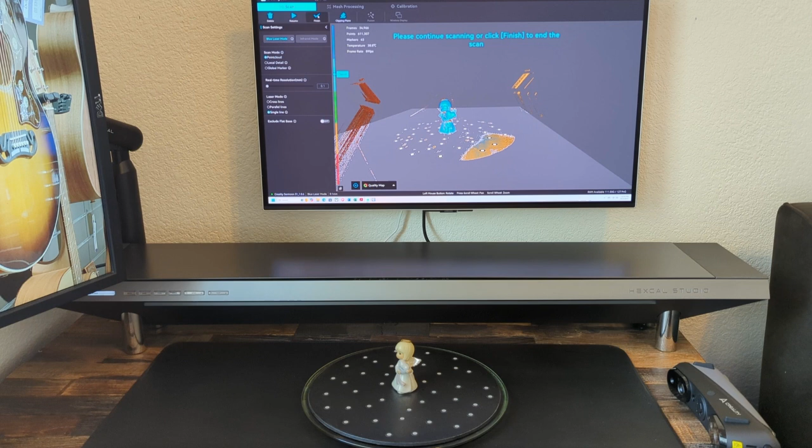Here I clicked on Finish to complete this particular scan.

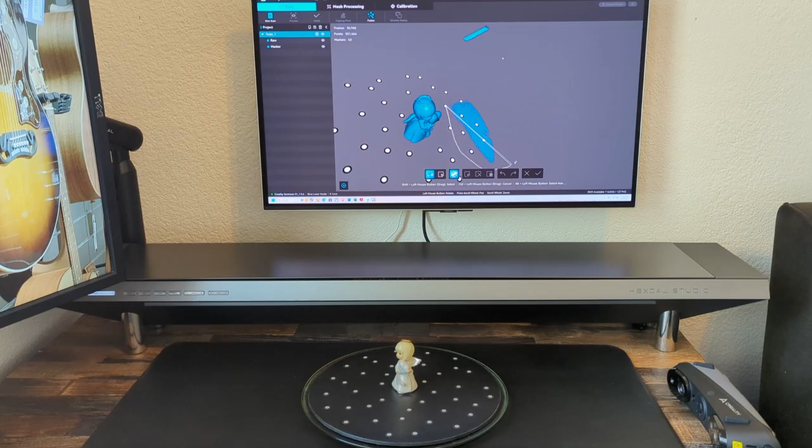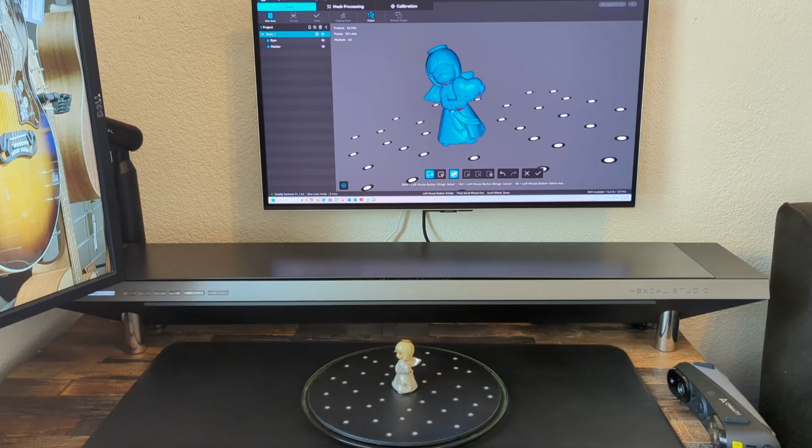You can also edit out any extraneous scanned information by selecting the Shift button and using the left mouse to circle around noise. It highlights it in red, and then you can click the Delete button. When you're fairly satisfied, you click the checkmark button to save the edits.

That's what I did right there. Now I've chosen to fuse the model. When fusing, I decided to use the standard instead of fast setting, and I used a resolution of 0.1 millimeters, 50% noise removal, and chose to remove the markers.

Here the model, or the scan, is being fused, and it takes some time. I left the speed here at real time so that you can see how long it takes to fuse a scan. You can choose to fuse after each scan, or you can wait and do several scans and then fuse them all at once through batch fusion.

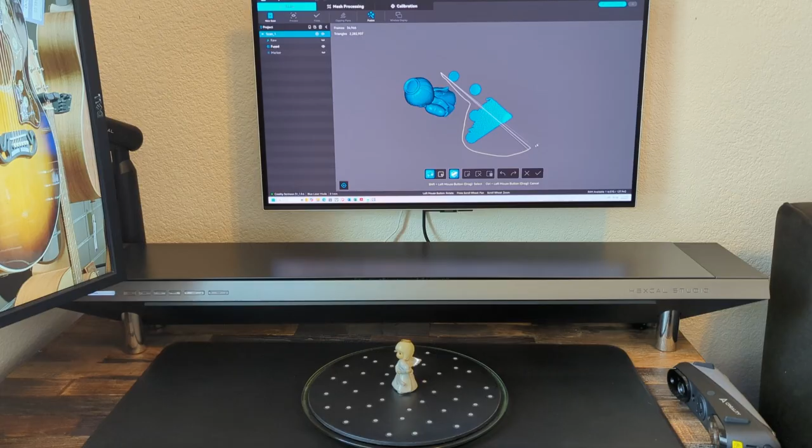Now that the fusion is done, you can choose to edit some of the extraneous noise. I'm using a lasso tool, using the shift key and the left mouse button to circle around the noise that I want to remove. I delete it, and check around the scan to see if there's any more that I want to choose to delete.

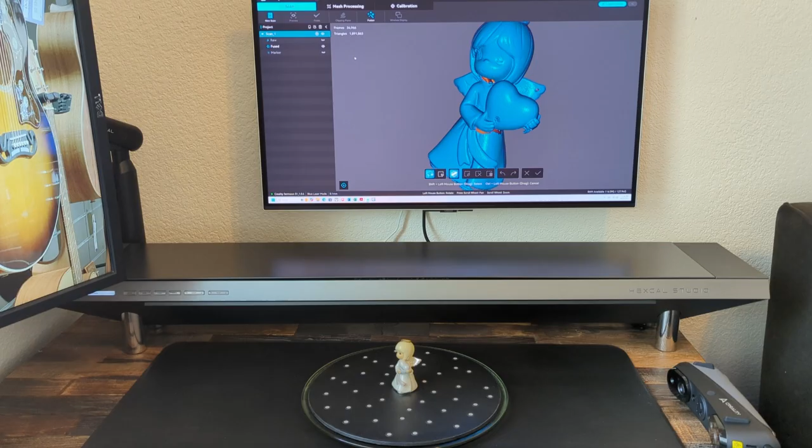I see that there's none, so I save it, and then I choose a new scan to scan a different part of the model.

I've put the figurine on its head using some putty. I'm using blue line laser mode, point cloud settings, 0.1 millimeter resolution, parallel line mode, and now I'm ready to preview this.

If you look in the upper right corner of the Creality Scan 4 software, you'll see a black box. In this black box, you'll see the exposure and brightness settings for the laser scanner. If the markers on the base of what you're scanning reflect back red, then you are overexposed. The same goes for the laser lines you see within this black box. You can adjust the exposure and brightness settings within this black box so that the laser lines look gray and the markers look white.

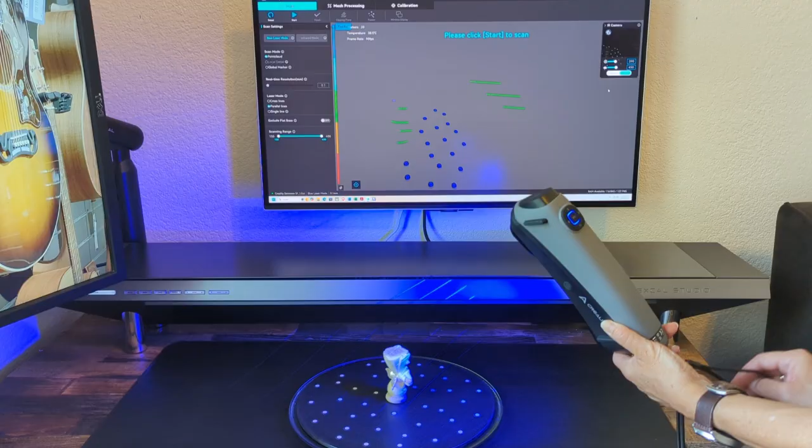So after the adjustment, I'm able to scan until the figurine area is blue. Here I've sped up the speed of the video by 4 times. It takes a lot of patience to do a scan.

At this point, I've switched to the single line laser mode in order to get into the cracks and the crevices.

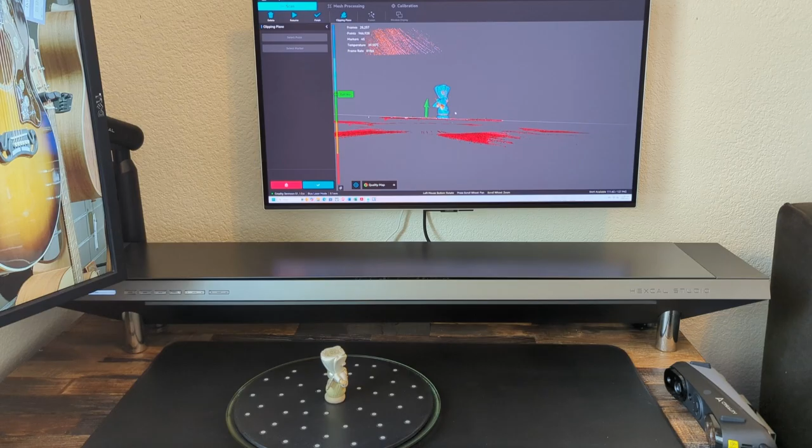I do that using the Alt key and the left mouse button. Once I'm satisfied that most of that has been selected, I go to the check mark and it removes it for me.

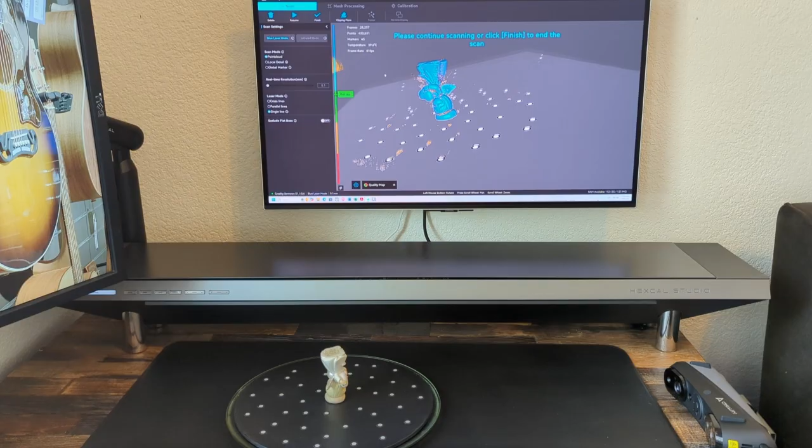I'm going to look at the model and make sure that most of it has been scanned. It looks like it has, so I'm going to finish the scan.

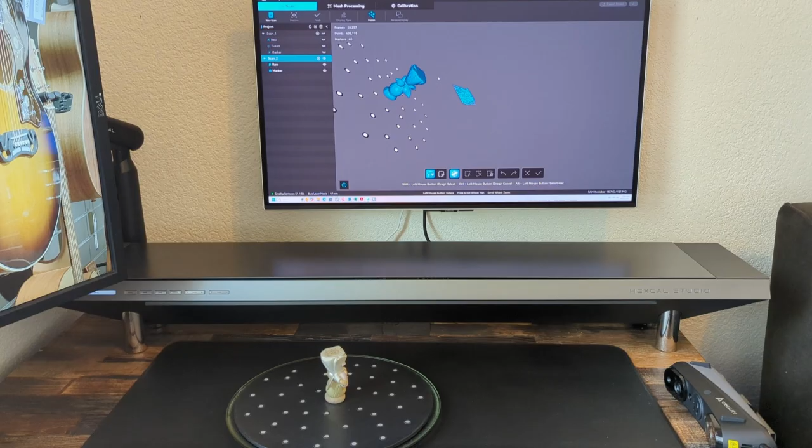At this time I can delete any other noise, so that's what I'm going to do. Using shift and the lasso tool, with shift and the left mouse button, I can circle around the noise and delete it.

When I'm satisfied that I've deleted most of the noise, I click on the check mark. Right there, I've saved my edits.

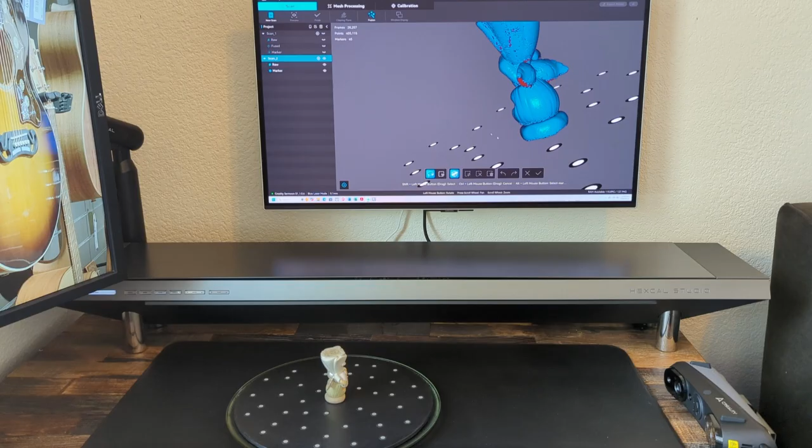Now I'm clicking on a new scan, so I can scan a different part of the figurine, using blue line laser, 0.1 millimeter scan settings, and parallel line mode.

I've switched the model around to the back side. When I say model, I actually mean the figurine.

I click on preview in the software to make sure my exposure and brightness settings are okay. It's very difficult to see in the video, but the box is also very tiny and still difficult to see even when you're looking at it directly, not through a video.

Fairly satisfied with the exposure and the brightness, so I start the scan by hitting the button on the scanner tool once. Here I've sped up the video speed by 4 times.

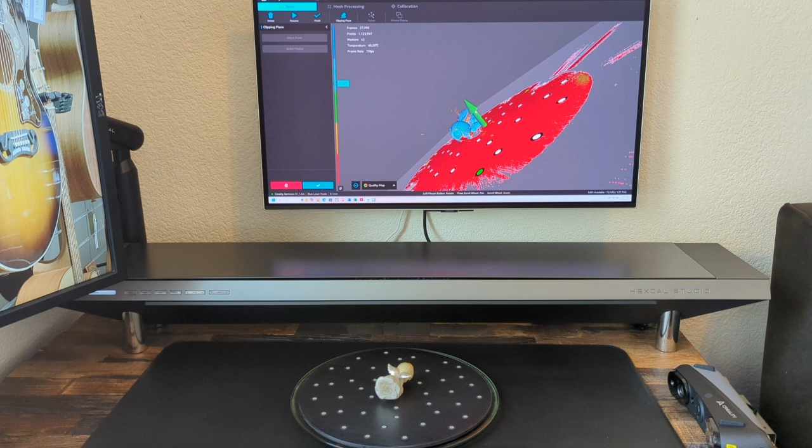I click on the checkmark button to delete it, and all that's left is my scan.

There's a little bit of noise here and there, but first I want to check and make sure that I've scanned or gotten most of the areas that I can possibly get with the scanner. I'm satisfied with that, so I click on Finish, and look around to see if there's any other noise that I need to delete or remove.

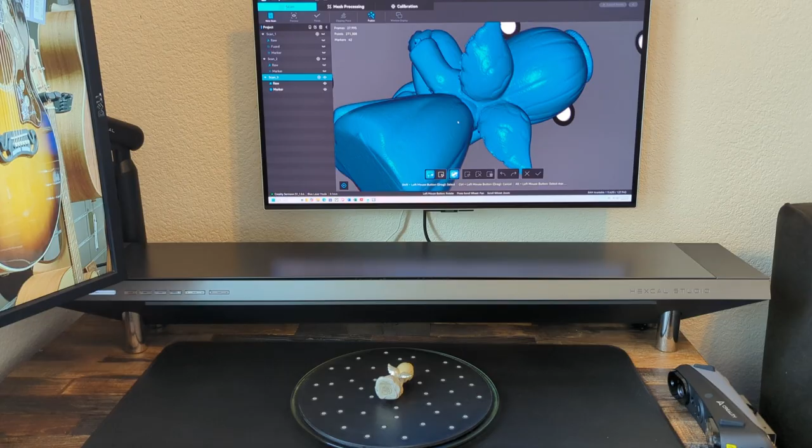I fuse here, so I've left it on standard, 50% noise level reduction. The resolution is 0.1 millimeter, and I want to remove the markers.

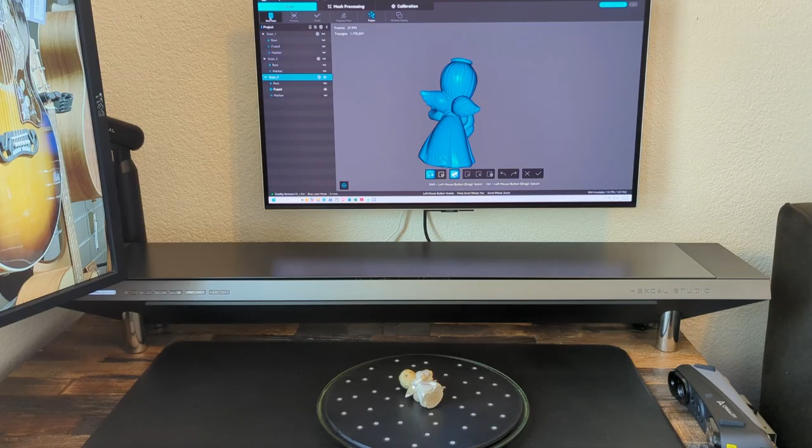Here I start a new scan, using blue line laser mode, point cloud, 0.1 millimeter resolution, and parallel lines. I click on preview.

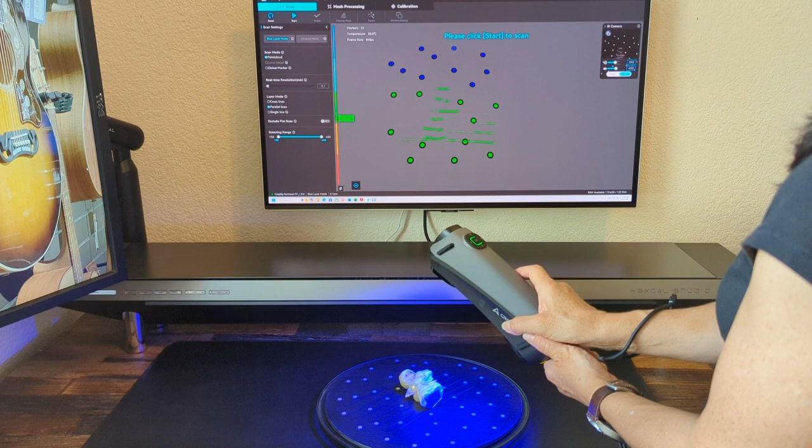I've switched the model around. I'm checking the exposure and brightness and starting the scan. I've increased the speed to 4 times.

Double-clicking on the button on the scanner, I've switched to the single line laser mode, again to get into those deeper crevices.

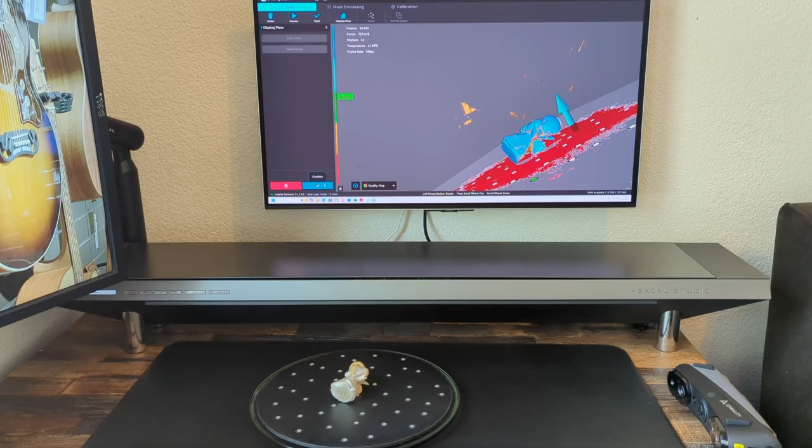So all that's left is the scan of my model and some noise. I've clicked finish in the upper part of the bar on the application.

Now I'm able to remove other noise around the scan using a lasso tool and the shift and left mouse button.

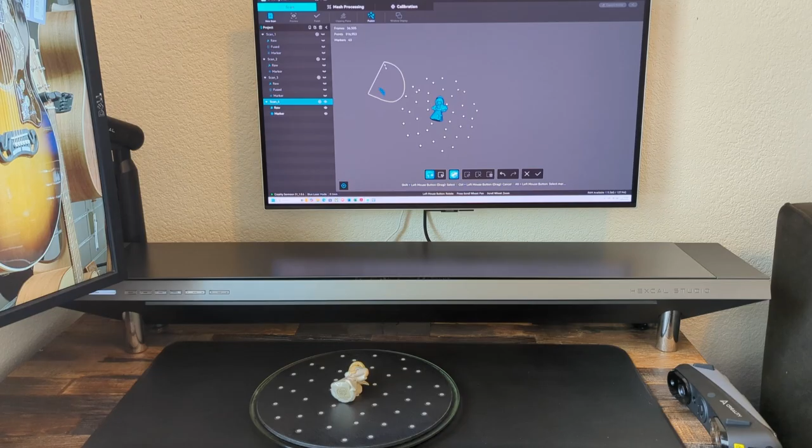I click on the delete key to delete the noise, then I want to check around on my scan to see if I want to delete anything else. I click on save my edits, and now I'm ready to fuse again.

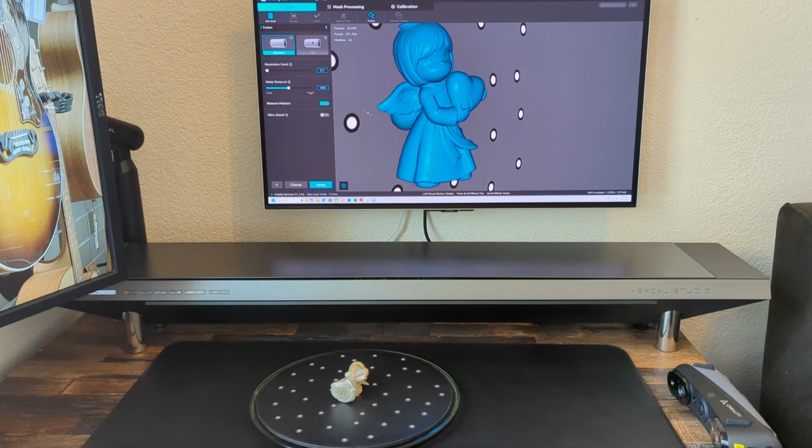Standard fusion, not fast. Resolution of 0.1 millimeter, 50% noise reduction, and removing the markers. I've increased the speed here to 4 times.

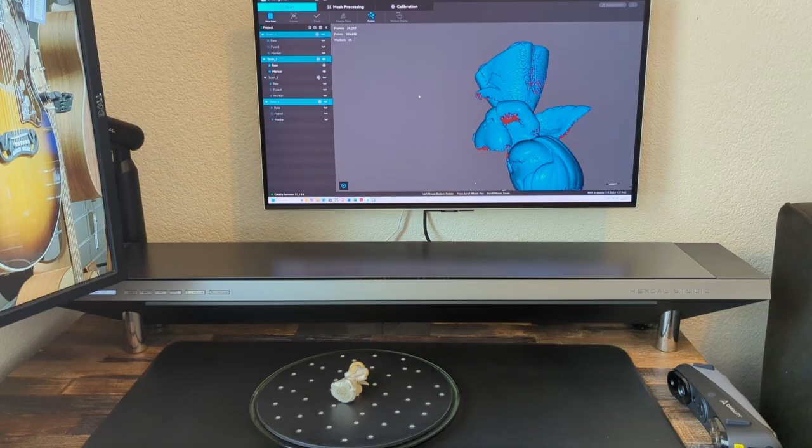Now at this point, I'm looking around at different scans to see which ones I want to align together. One of the scans didn't turn out very well, so I won't be using that one.

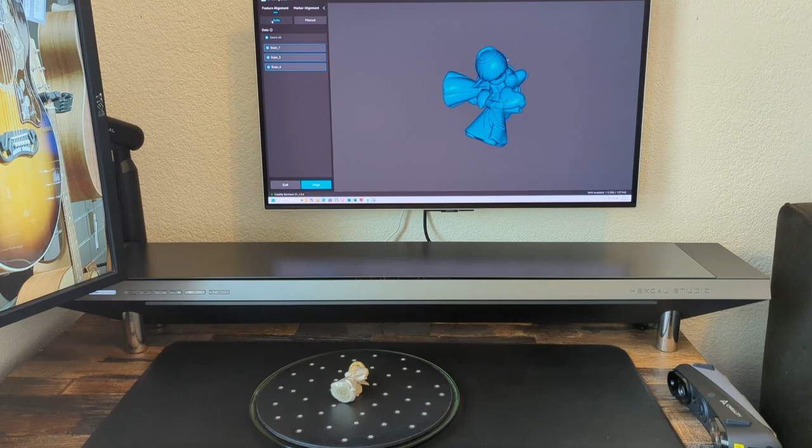Click on the alignment button at the top of the screen, and then I can select which of the scans I want to align. I tried an auto align first to see how that would look.

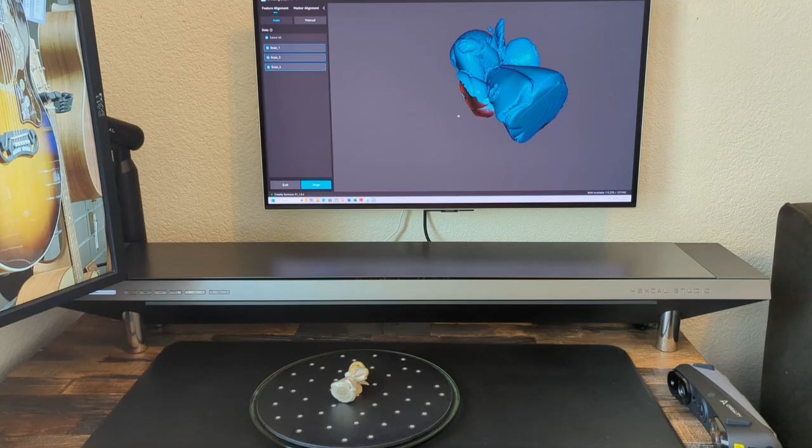It looks okay, but there's a couple of the models I forgot to delete the clay that held the model in place, so I can go back and correct that.

So I exit that, and then I can look at which scans need to have the clay removed. Unfortunately, I can't delete the clay because the edit toolbar is missing.

Here I clicked on the meshing button located at the top of the screen and selected the highest number of triangles in order to improve the surface of the model. I also selected the highest level of mesh smoothing, highest boundary smoothing, the highest percentage to remove isolated parts, and the highest setting to remove spikes. I also turned on the setting to fill holes that were at least 5 millimeters in size.

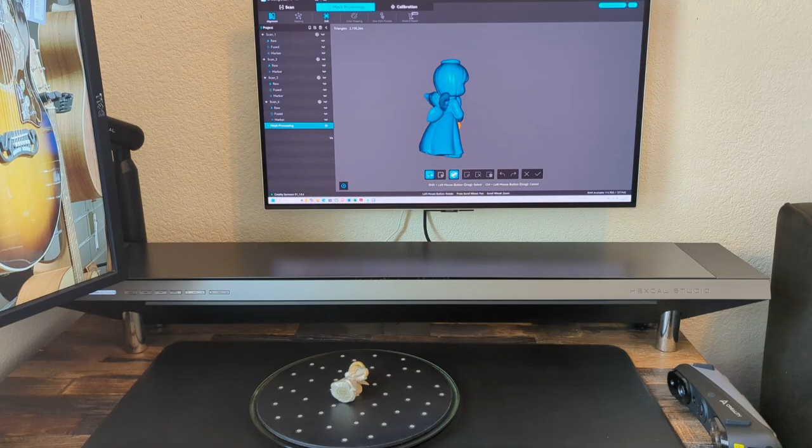So here is the mesh. I can see that there are certain pieces of clay still available on the mesh that need to be removed. At this point, I'm looking at which of the scans have the clay that need to be removed.

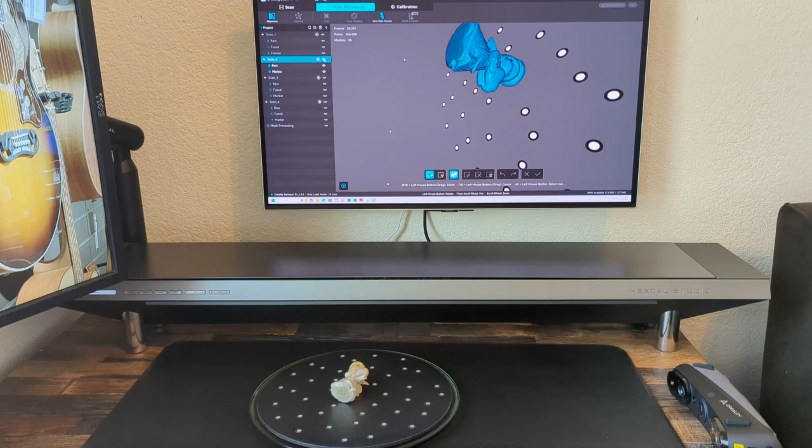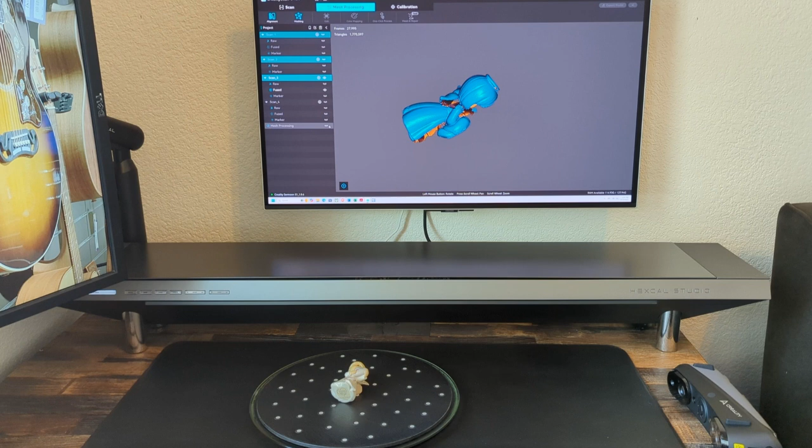Notice how the edit toolbar is missing under each scan layer. I actually have to click back and forth between the mesh layer and the scan layers in order for that bar to show up, and then I'm able to edit the scans.

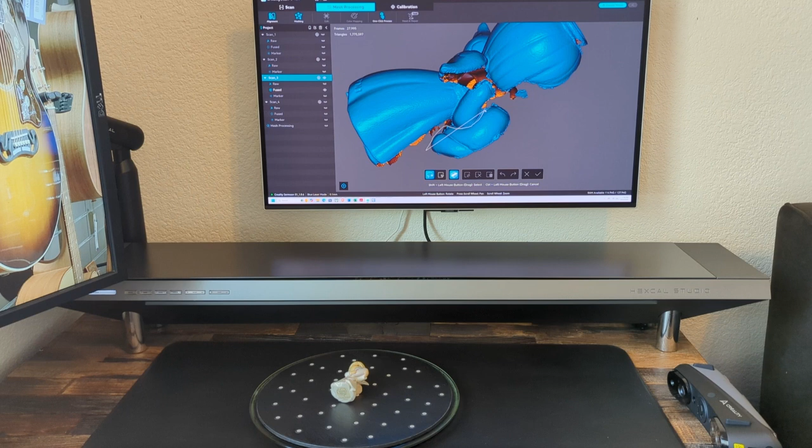At this point, I'm going to use the lasso tool and the shift and the left mouse button in order to remove the clay from certain scans. I've deleted the clay, and I look around for any other deletions that I might want to do. There's some more to delete, so I use the lasso tool to circle around those, to remove those, and delete those too.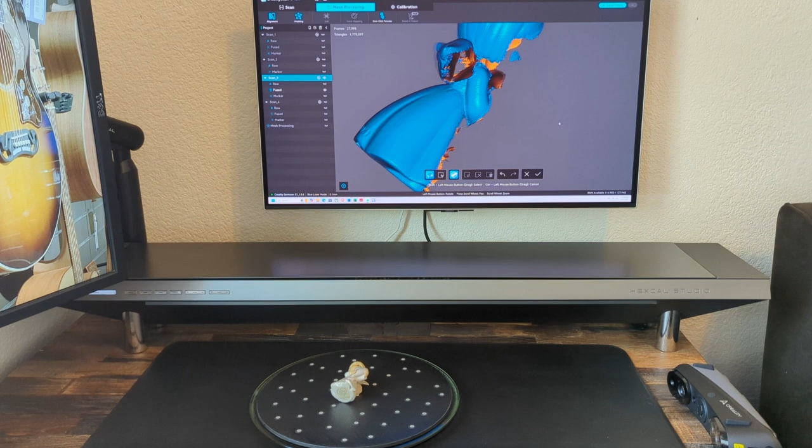Now that I'm satisfied, I save those edits on that scan. I look at the other scan, and there's some clay that I need to remove from this scan as well.

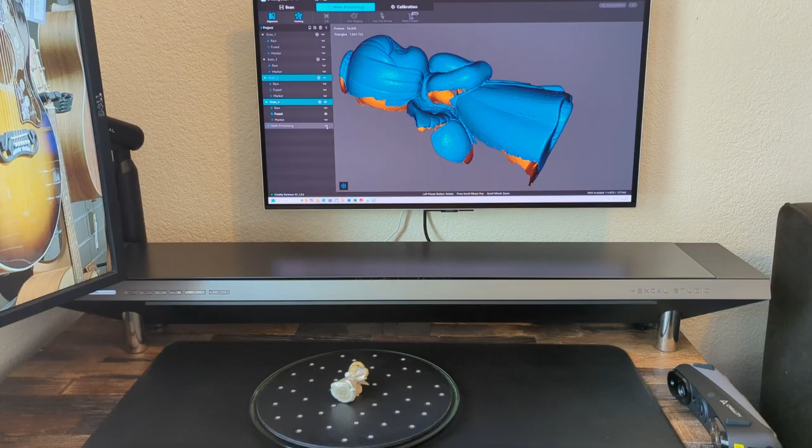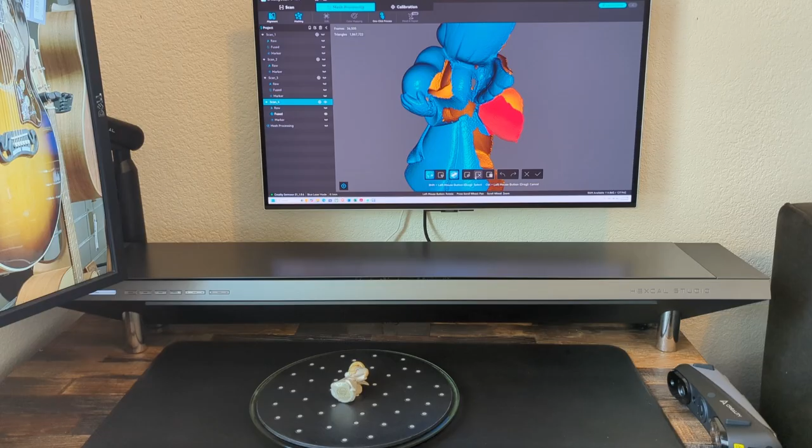Notice that the edit tools are not available unless I click the meshed version of the scan and then go back to the original scan, and then I get the tools. Tools are available, so I use the lasso tool and the shift and left mouse button to circle areas I want to delete. I delete those, and then I save the edits.

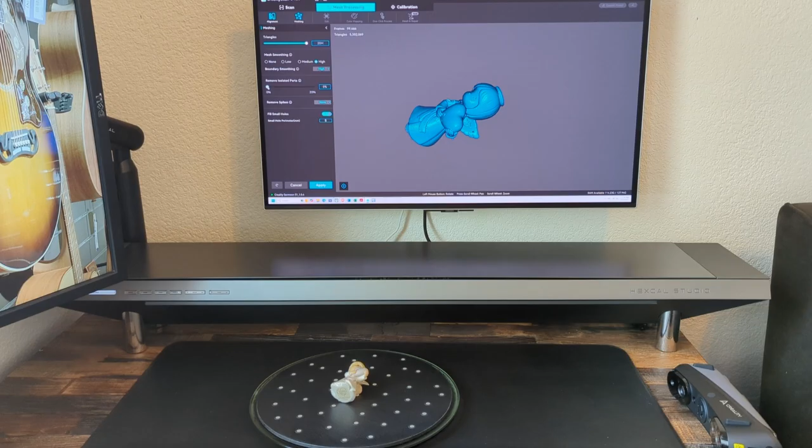I click on the meshing button again and use the same settings as before, and then click apply. When you use the highest number of triangles in the mesh settings, it can slow down the processing of the mesh, so you need to make sure that your computer can handle that setting. I've sped up the video to 4 times the speed.

After looking at the mesh, I've noticed that there are still some imperfections, so I'm going back to the scan where I see the imperfection and using the lasso tool to select and delete the imperfections.

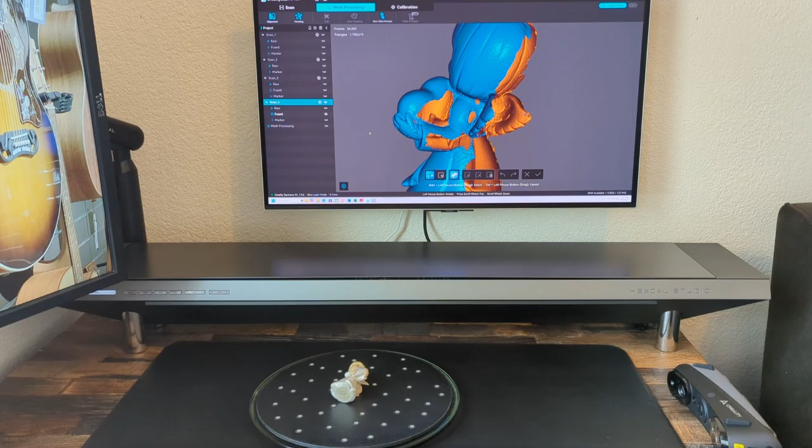When I look back at the mesh, I want to make sure that there's no other imperfections. So I'm going back and looking at some of the scans again. Here I run the mesh yet again.

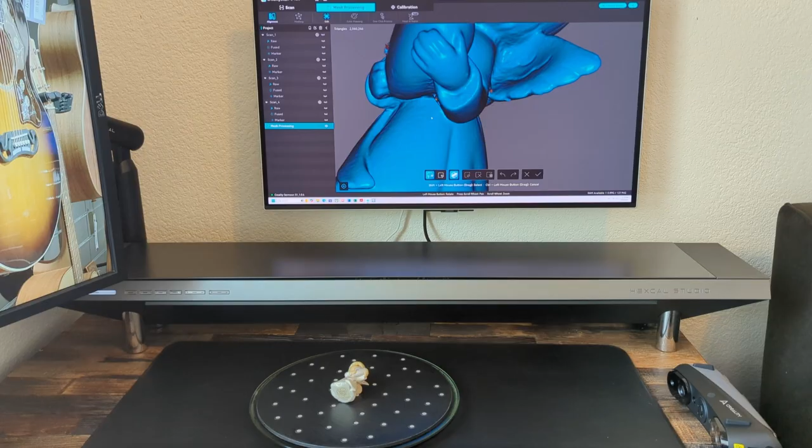I can still see that there are some holes in the mesh, so I'm going to edit the mesh this time, not the scans. So I click on the edit button at the top of the application, and here I'm able to fill in holes.

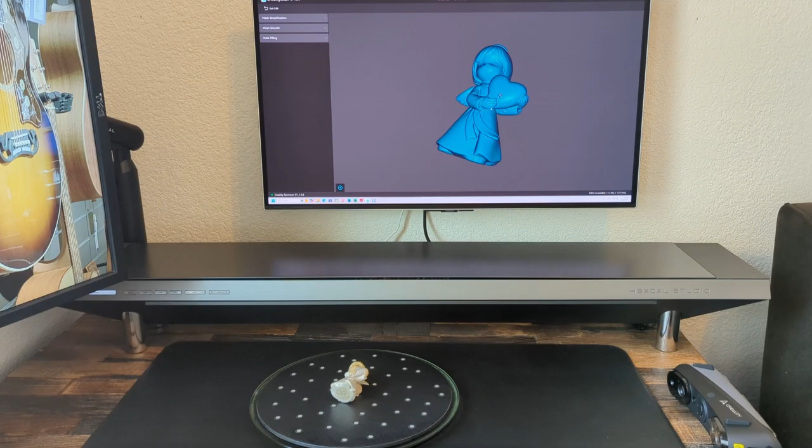I'm doing the manual setting, and it highlights where it sees holes. By hovering over it, it turns red, and if you click on it when it's red, it actually flags that area to be filled in when you click OK at the end.

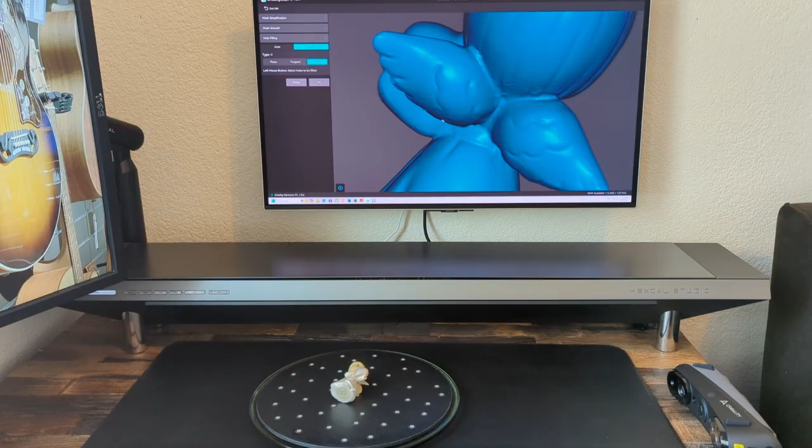Now I've exited out of the edit of the mesh, and I'm looking around at the model to see if there's any other areas I want to fix. There are, so I'm going to use the lasso tool to delete imperfections. Once I'm satisfied, I'll save my edits.

I'm checking around the model because sometimes when you select something to delete, it will delete other things in a straight line right across where I've lassoed the piece that I did not want in my model. So you have to check on the other side to make sure that the scan isn't being deleted on another side.

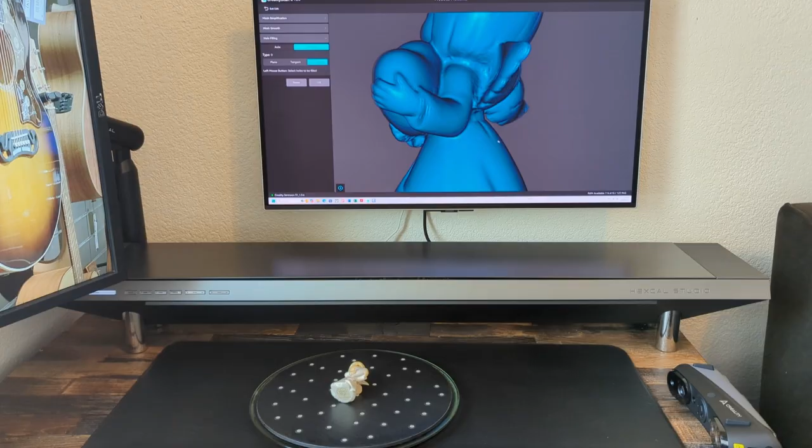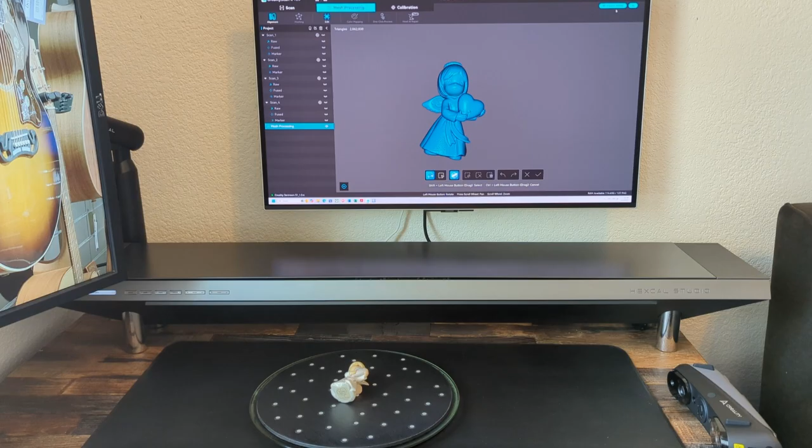At this point, I back out of that area. I'm editing the mesh, and I'm pretty happy with my scan at this point. Now I can export it. So that's what I'm going to do. I'm exporting it as an .stl file.